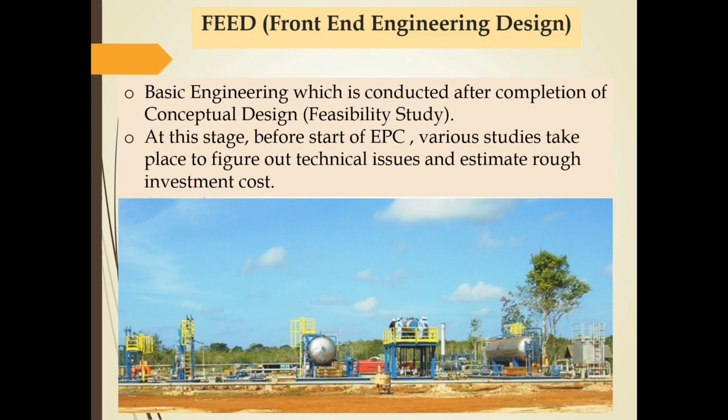FEED is carried out after completion of the conceptual study. At this stage, prior to the commencement of the EPC, various studies are conducted to identify technical issues and estimate investment costs. In the FEED stage, equipment calculation studies and also processing facility design, which consists of development of technical drawings involving multidiscipline engineers, are carried out to calculate the optimum investment cost of the facility.